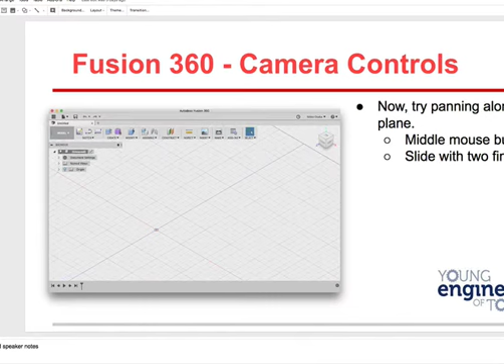I'm going to go through a real quick review of what we did last time and go kind of quick, so that way we can go on to doing the next part. So yeah, making a lamp. We talked about what CAD was, and we started using the work screen on it, and we made a box. And I'm going to go through the steps in this, and remember we had the edges on it, and then we could place materials. We put a hole in it.

All right. Now, what I want to do right now is do it on Fusion 360 and show you some things we did there. And you can go doing it right along with me. So, yeah, Fusion 360, please bring it up. All right. So now I'm going here. I got a new sketch right up here. It's untitled. I'm going to create a box.

Now, the minute I click here on the box, notice it's a sketch. One thing I want you to understand: sketches are 2D. Boxes and objects you make many times are 3D. So that's what's going on. When I go over there, it kind of just messes up. So I'm going to take a point here.

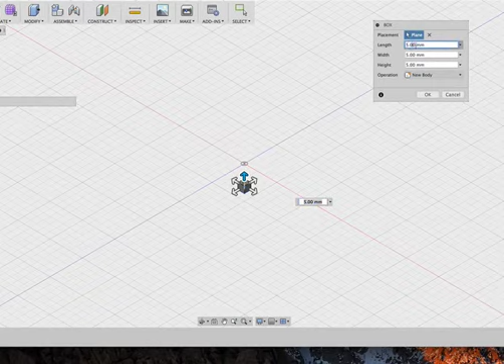Now, I had this box. It becomes now a body. And that's what this is right here. If I turn this off, it'll go away. I turn it back on. So real quick, draw your box, just so you see that again.

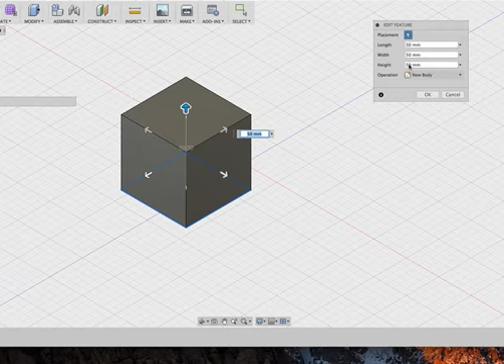And then as you draw your box, remember, don't click on these top ones. Don't just create a form or extrude. Go down, select the box, nail it. All right? Then highlight the box, right click on it, and you can edit features. That's where you go when you want to change the size of the box. Sometimes it doesn't show that, so remember to go back and grab the whole thing. But in here, I could change these all and make them all a different size. All right?

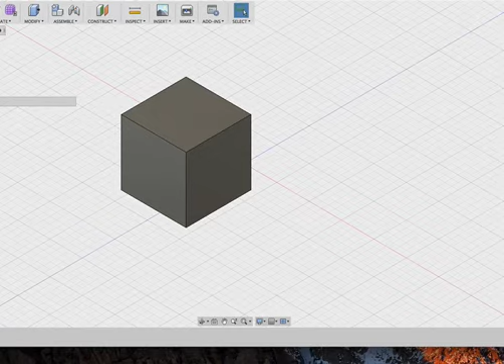Raise your hand if you got the box made, so that way I know you've done the box, and I can show you some more things off that box. All I want to do is spend 5 or 10 minutes on this review and get on to the next part. So let's get you going on this. Is anybody raising their hand right now? Raise your hand once you have it. I will wait until you've done it, because it still makes more sense for us to do that.

Got our hands raised? I'm going to assume at this point, if you can't turn your program on for some reason, just raise your hand then, so we're not waiting on you. But if you're working on it, we understand, and I will gladly wait. So Calder or Ethan or Mike, Raiden, if you've got it, raise your hands and leave your hands up.

Okay. Again, if I go here, select it like that, right click it. Remember, feature is changing the size. If you do properties, you're going to get physical materials, appearance, all that, which is really useful if you're an engineer, but we're not engineers yet, so we're just going to go with this now. But you should just know the difference. In a lot of programs, properties give the description.

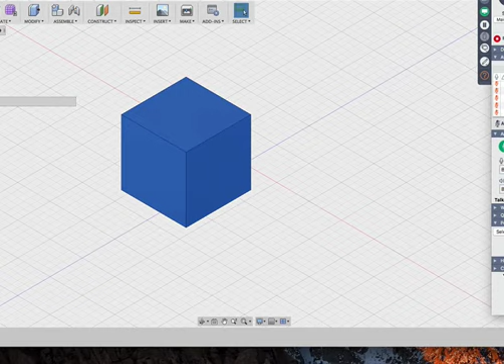All right, next thing then. We want to modify this. So we're going to click, we're going to hit fillet. Now, what I would really suggest, I'll put everybody's hands down now. Go back over here. The menu, follow the menu. Whenever you select fillet or edges, there'll always be a menu. So notice it says, hey, select the edges.

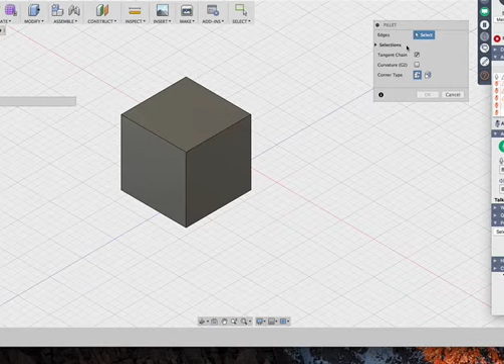Now, if we go over right now like this, we should get all 12. I did. Sometimes you don't, and I physically have to go around each one. And then I'm going to make this, let's make it, oh boy. Let's make it 5. And then we say, okay.

And there they are. That's my fillet. We did that. And finally, let me see if there's questions. Let me check questions. If I leave it because I'm in the car, I understand. Wow, how did you get?

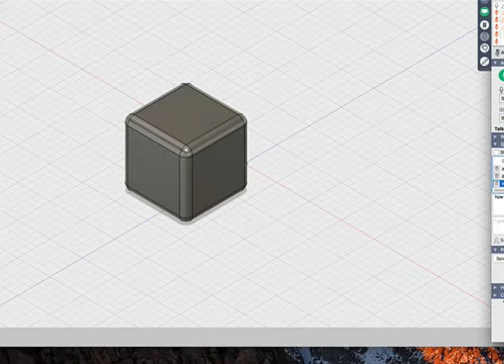All right. Now, next thing, I'm going to go another create. And what we're going to do here is a hole. So I just put this on this plate. Again, placement here. Then it says hole type. Simple. They have counter bore, counter sink, all kinds of nice things. I'll go counter sink just to try it.

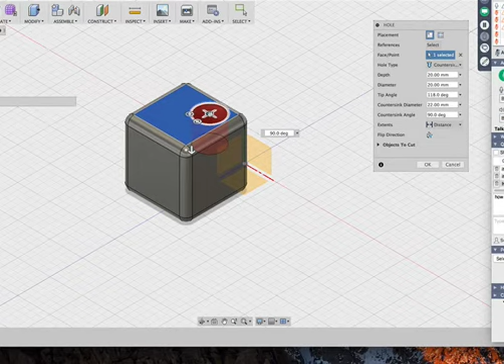All right. Notice you can change that. If you make it a counter bore, you can start counter sink. You can do all these extra things. So that's a little bit better with a counter sink. I'm not really worried about changing it. Say OK. And there it is. Remember, we use these to get around, pan, zoom to fit.

We have a square up here, which isn't always really easy to see. Move that around. And there it is from the top. And there it is. Okay? And then we went into materials and properties, but we'll do that in this next thing we're going to do today. But that was really the kind of goal. There's our bodies. And you kind of get a sense of what we're trying to do with this. All right?

Anthony, you don't have Fusion. You're going to need to go. Okay, guys, you weren't here, so here's what you need, and you get to the webinars. I'm going to take you right here so you can download it. But you really have to have this. So go over here and watch me. Everybody else, watch me if you don't have Fusion. You're going to go to Fusion. Don't get it yet. You're going to go to Fusion 360. You're going to go click there, and then select the one that says Free Software for Students and Educators.

Create an account. Use your school email if you can. If you can't, talk to your folks. Or if you already have an account, sign in, then register, and then it'll have the download. For today, I'm recording this, so I'll make sure it's getting recorded. It is. If you don't get everything, just follow along, then you can watch another recording. I also, if you weren't here yesterday, have handouts. There's the PDF right now of the handout. Making a Lamp Part 1 PDF.

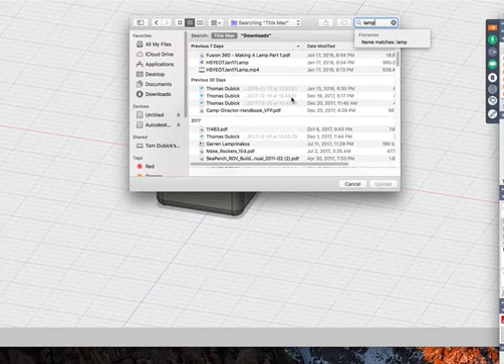Now let me see. I'm going to choose a file here. I might add another file, because you're going to need it. Let's go here. There we go. I'm pulling down a file here. Okay. It's not what I want. I thought it would download right there, and I don't see it right off the bat. Let me do a quick search. What was it? Lamp. Nope. Okay. Bear with me one second. I will now go into Google Classroom. I'll tell you what, since you had that request, we'll do it all right now. Sorry for the interruption.

There's our first project, making a Fusion. I'm going into my, here it is, shade profiles. I'm not sure if I can just drag it in here. I don't think it'll let me do that. All right, let me do this. Download. It says I had it, so I don't know why I couldn't find it before. No, PDF, yes, that's so you have notes, so you can go through it. So I'm going to choose a file right now. There it is. I need everybody to download this file. It's going to upload right now, shade profile. Everybody's going to need that.

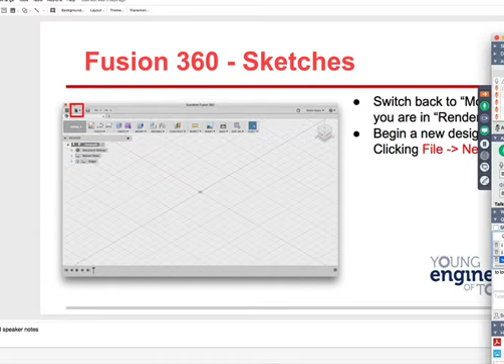You can't what, Ethan? Ethan, you say you can't download it? Are you on a PC or a Mac? Some kind of computer? Low battery? Well, get it plugged in, my friend. I hope you get it down the road. Okay, buddy? Just watch this and what we're doing. All right?

If I have to, we'll get this thing loaded as soon as possible later. All right. Now, we're going to go back here. You're going to go under File, New Design. I'm going to show you on PowerPoint first, and then we'll do it together. But let's look at the presentation, and I'll make sure to show both ways a couple times. So you're going to go under New Design. Up here, get New Design.

Then, over here where it says Insert, you insert Attached Canvas. Everybody watch me first, then we'll all do it together, okay? Watch me first. So you're going to insert canvas. In fact, I'll do it in Fusion. Maybe we'll do the PowerPoint. I know that might make more sense. All right, so here we go. I'm going to go over here. File, New Design. There it is. Just watch me. Don't do it yet. Insert, attached canvas. Just like we said before, look at the menu that pops up and follow the order.

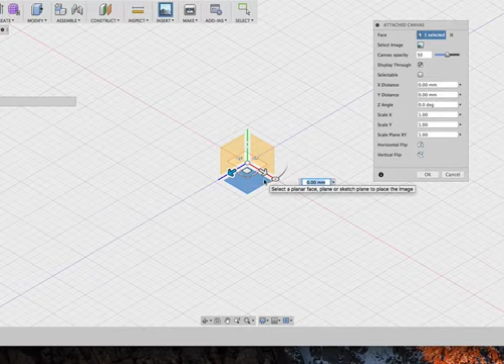First thing, identify the plane. I'm doing that right there. Then I'm selecting an image. Now I'm going to pick shade profile. There it is. I hit open. Now, opacity, I'm going to make sure that's at 50. Yours might be at 100. But I'm going to zoom in a little bit. And when I do, I realize the lampshade, I'm going to zoom this to fit.

All right. This lampshade is the wrong direction. I don't want it there. So I'm going to go to Z. I'm going to make that 90. Now it's about where I want it to be. Then, notice up here, there's nothing on here until I say okay. Then it shows canvas. And if I look at my canvas, it shows shade profile. So let's all do it now together. I'm going to back this up.

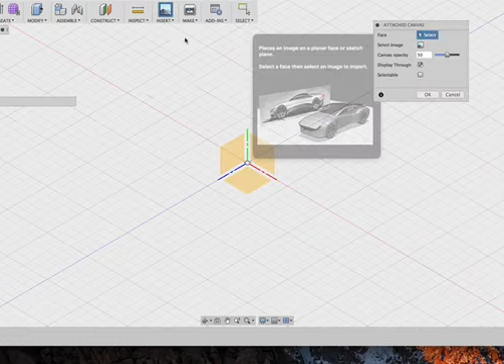All right, so I'm going to come in, everybody together, hit insert, hit attached canvas. Select the face. Boom, there it is. What I want you to see, of course now, I'm not sure why, but all of a sudden it doesn't want to do it. Let's try that again. Insert. There we go. All right, I was able to select it. It was something with my webinar software. That's why I was doing that.

I got one selected. I'm going to select an image. Shade profile. Notice when it's 2 dimensions, it's usually a sketch. And this is what we've got to begin with here. Opacity means how well the grid can come through my drawing. But I still want to see my drawing because I'm going to trace it. Then, it's going the wrong direction here. So I change the Z angle. I select 90. Now it's flipped to about the way I want it.

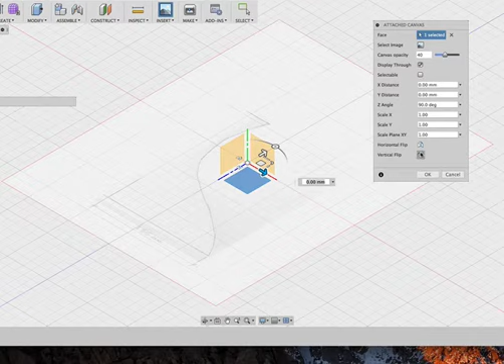You can do a horizontal flip. You can also do a vertical flip. There we go. Once you have that, I'm going to say OK. Now, in case you're saying to yourself, how do I change this? Let me close this and make sure. If you see canvas, over here by comments, click on this down arrow, then right click on shade profile, edit canvas. That will allow us to do things right up here. So when everybody has their canvas like this, let me know.

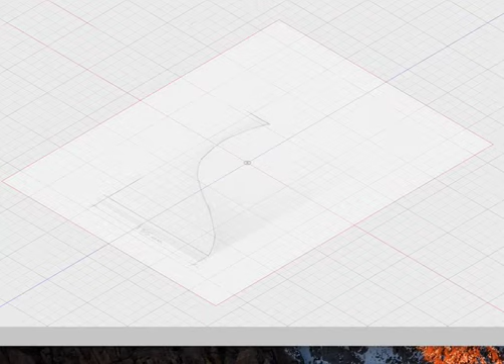So think of Fusion: when you're using Sketch, that's 2-dimensional. When you make the blocks, the cubes, everything else, that's 3-dimensional. Raise your hand once you've done it, folks. All right, a bunch of people have. Well done. Let me go down and see what questions we have. No questions. Raise your hand once you've got it. Mike, we need to make sure you guys got Fusion 360 loaded and set. All right. We got just about everyone here.

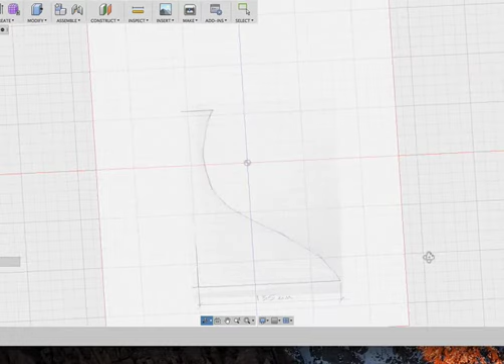All right, now I'm going to go back over here. I'm going to move this around. I'm going to grab that square and get it turned around like this. I can also do it here, but personally, I don't like using the orbit like this. I like grabbing the square, but that's just me. Again, hit escape to get out of the orbit or panning. If you hit the little hand, you can pan it. But if you don't want to be in that anymore, make sure you hit escape.

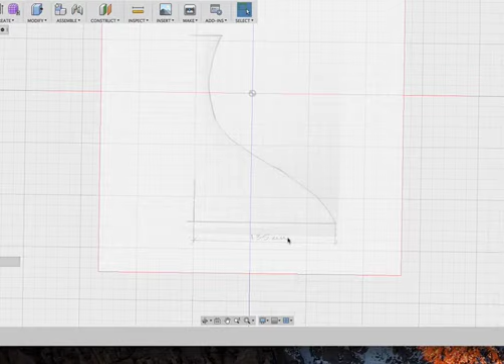All right. Our drawing calls for 135 millimeters. We don't really know what size our drawing is yet. So the best way is what's called calibrate. Because remember, when something's digital, you really don't have any sense of scale. So I'm going to go to Shade Profile.

I'm going to right click. I was renaming it, almost there. Hit Calibrate. I'm going to zoom in a little bit more, gently. I'm going to pick here. I'm going to move it over, pan over, hit Escape once, and then hit here.

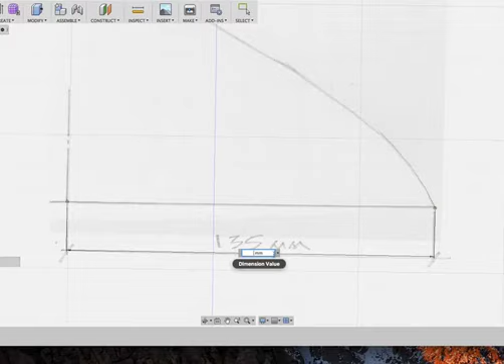Now, look at what I'm doing, guys. Don't you be doing it. Watch what I'm doing so you can understand. If you look at this, it says, oh man, I'm 6.3488 millimeters. Well, we want it to be 135 millimeters. So we need to go down here, change it to 135 millimeters, and then press return.

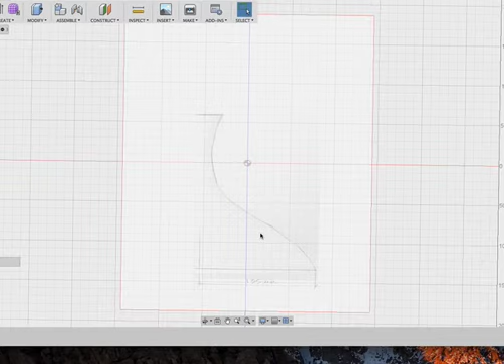And now all of a sudden, oh my gosh, I've lost it, I've ruined it. No, you haven't. Go to fit, and you'll see it's just gotten a lot bigger. So don't think that you lost it. It's just gotten a lot bigger. It went from 6 millimeters to 135. Put everybody's hands down. Let me know once you've done that.

Okay, get your hands up there once you've done it. This is really going to be worth it, guys, once we get through it. It's pretty cool. All right.

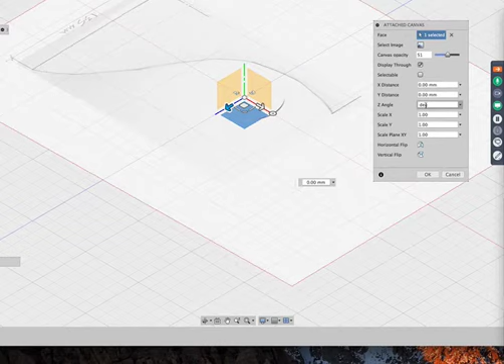Then change it. Now what you can do is flip it. All right, there we go. Wrong way there. Wrong way here. Let me see where we are. Yeah. I'm going to go back here and just make this 90 degrees. Okay. There it is, 90 degrees. There you go. So now you have it there.

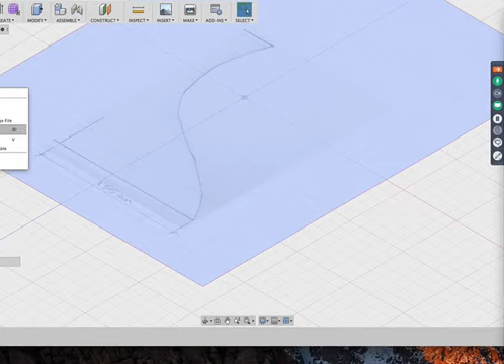We did something called calibrating it. And all you did is go to our canvas, right click on it. Well, wait a minute, lower it down to do all canvases. Right click on shade profile and then do a calibrate. That's where we went on one dot here, and we hit it for 135. There we go. Now, it looks like it's disappeared. It's just a lot bigger. If you do zoom to fit, you'll see it. There it is. Let's go back to 2, though.

All right, so there's my 2. I got this shape by changing that square up in the corner. Okay, there you go. Good. I've inserted my image. Okay, good job, man. Good job.

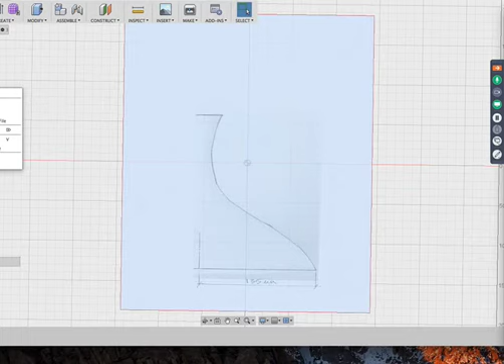All right, now, remember, I'm going to move the corner of this drawing right there because I just want it over there. If I click on shade profile, hit edit canvas, there I am. I'm okay. Now I'm going to say okay.

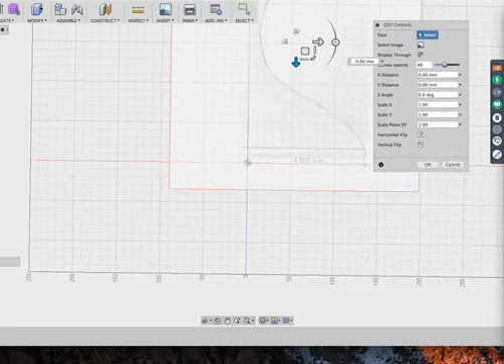So, actually, I don't like where I put it. I just messed it up. I want to go here. Edit canvas. I'm going to move it down here. I want the corner of my drawing to be here. If you can see on his drawing, he really didn't have it perfectly lined up. That's okay. And then we say okay. There it is.

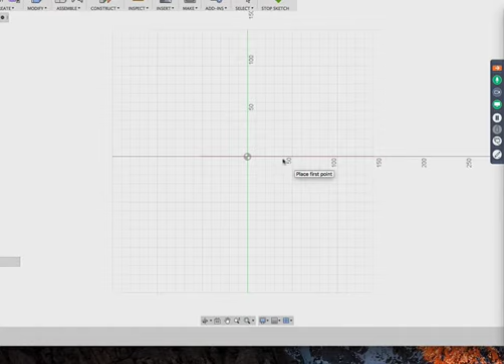All right. Now, next step. What I want you to look at now, let's get rid of this. We know we've got the canvas stuff. We're going to go back to sketch because we're going to trace over this. I'm going to do this by hitting L for line. All right, so here we go. Oh, I don't want to do that. Sorry. I'm going to undo line.

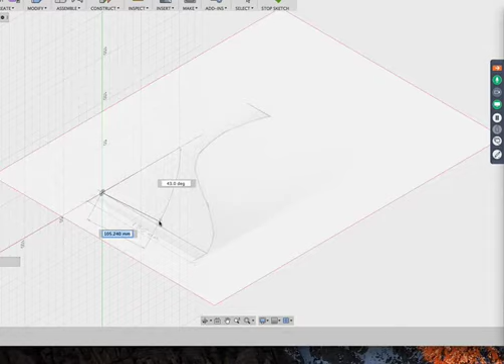All right, so what I'm going to do is, let me do it this way. Sketch. Go down here, go to line. And I'm going to click here. And I'm going to click right on the edge of this.

Now I'm just going to press enter. This line we've got to get rid of. All right, let me zoom this around a little bit better.

See, I've got another line. See how that's in there wrong? You know what, folks? I'm going to go back to home.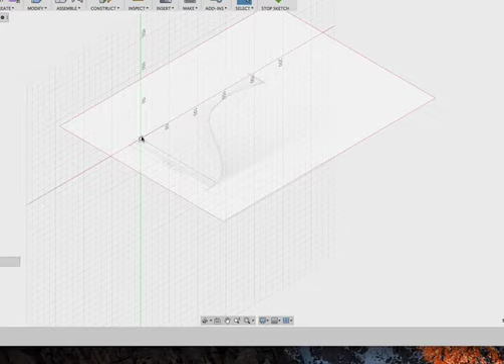That line, see how important it is to have your right line there? Let's get this turned, and let's move this origin. Let's not do it to the origin like that. I like the red line, and I like the corner there, but I don't like the fact that it wants to change top, bottom, and side by having it there. So I'm going to move this a little bit.

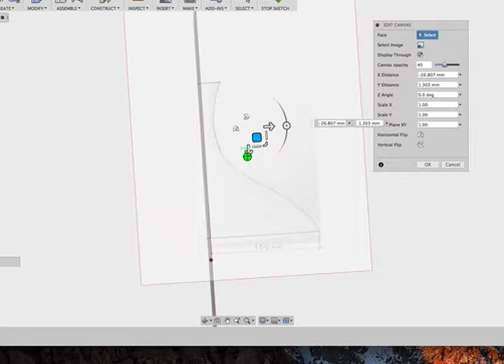All right, there we go. I'm going to still line it up here, but I'll move it right there. And then I'm going to go to front. So let's go up here. Top. There we go. There I'm on top.

This is more what I really want. See, okay? Then let's zoom in here. We're going to make our lines again. I don't have to worry about it blasting through like I just did.

So go to line. I'm not sure I'm getting this now. Unless I'm just drawing in the wrong line, which might be. Let me see something.

Okay, this is what happens when you get weird in 3D. All right, I'm going to do that.

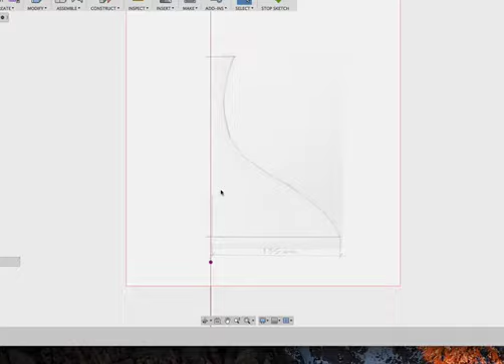I'm just going to start over here, folks. I've gotten my origin off. So now I'm not really drawing. This is not in the right plane anymore. I've messed this up. I'm going to go back.

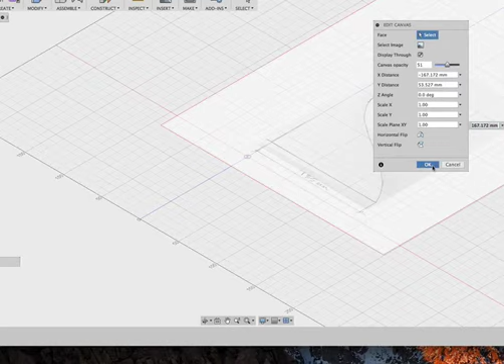I think the better thing for me to do is go here. Of course, edit canvas. I just want to keep it sure I'm on this top plane. I'm going to make sure I calibrated it.

Calibrate. Bear with me one second. Yep, it's calibrated. Escape, we're set there. I want to make sure I'm on this plane right here.

Oh, don't do that. Let me use my hand here. Pull it down. Sometimes honestly with Fusion, it's faster just to start over and do it again. This is not hard, what we're doing here.

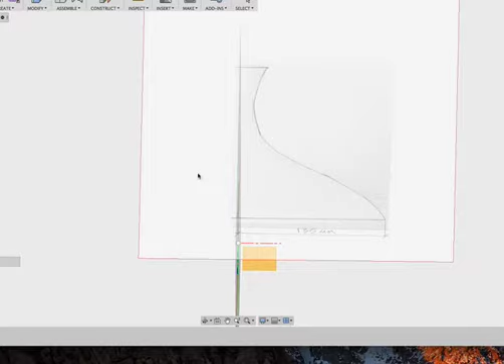So I'm going to hit create a sketch. Line, which is also L. I'm going to select here, this point right here. Let's go back.

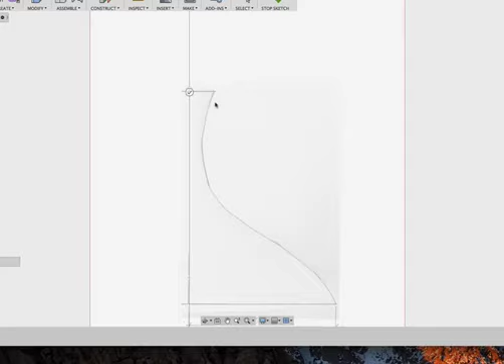Top, come on, let's try it right here. Got one line there. So I'll start down here, hit L again, click here, to here.

Let me get the zoom to fit. Then up here.

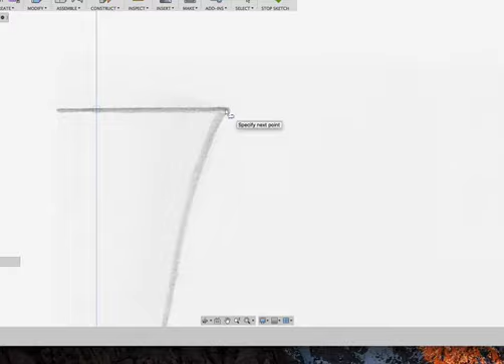Folks, I've taught this seven times today, and I'm getting a weird one. I use this square up here. I rotate it off. I'm in a wrong, somehow I've got this thing acting like I'm in a really wrong axis. So I'm going to go back.

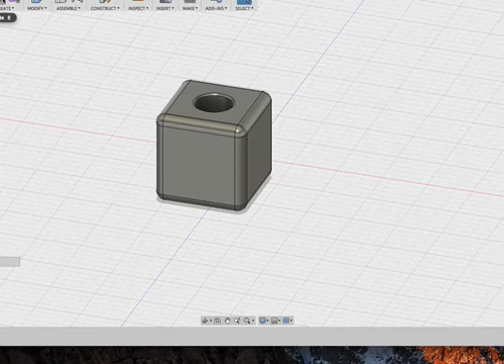No. I'm just going to get out of here real quick. Let me do this. All right, here we go.

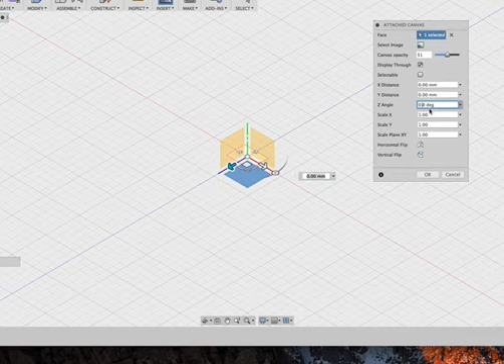Bear with me. Done some of that. There's 90. There it is, that's good. Okay, okay.

Right now I'm going in there. It's editing the canvas, don't really need to do that. I'm going to calibrate. Now I think about it, calibrate it, because I started over.

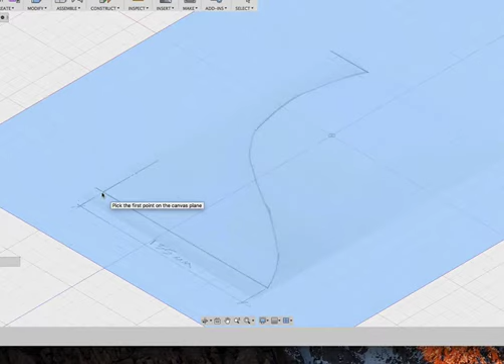There's 1, 2. Make that 135 as it calls for in the plans. Zoom it to fit.

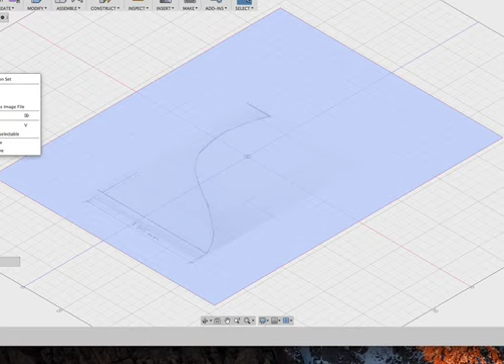Great, now I'm going to move this. Having done that the last time, I'm not doing it that anymore. I've not had that happen before, but you know what? That's going to happen again. I'm going to just move it like over here.

Okay, now I'm going to move this box till it's where I want it, right there. And what I want to see next. Make sure not to. All right, great. So we're still where we need to be.

All right, then go to sketch, go to line. Mine is that really weird. See, mine is now placed. See how it's placing it?

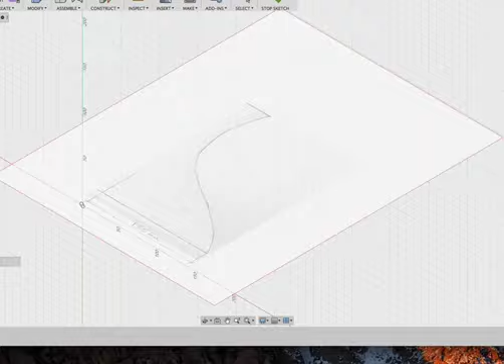No matter what I do, it's. All right, let me try this. It's not going to place on my. Folks, I got to get all the way out. Mine's just acting odd. I thought it was me at first.

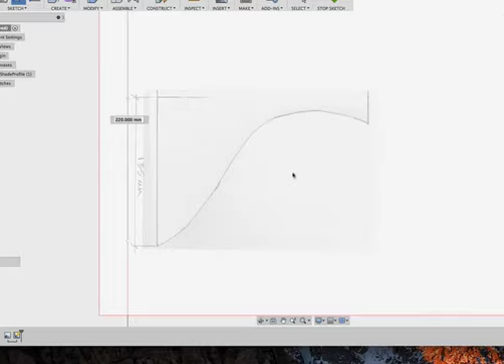It's my Fusion. Bear with me a second. Don't save it. I'm going to start it back up. Hopefully we'll fix it. I apologize if you're trying to rotate it.

I can show you on my presentation slide what's going to happen. Let me go back over to that. So, and I'll bring it up in a minute. We changed it, changed the opacity. We rotated it around so it would look like this. Let me go ahead and bring it up like this.

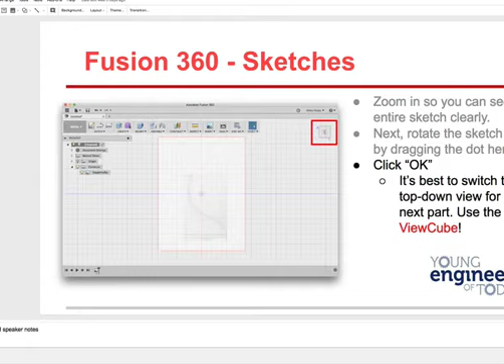All right, so we changed it so that was the top, so it was like this. And that's what I expected. Then we're going to calibrate it.

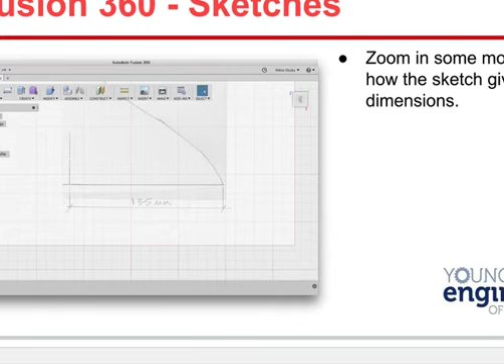Hit right-click on Shadow Profile. Hit Calibrate. Change that to 135.

You want to line it up with the axis, so we hit Edit Canvas, and we move it over the axis. He's got it right on there.

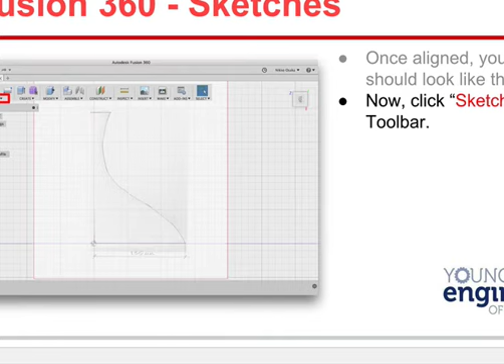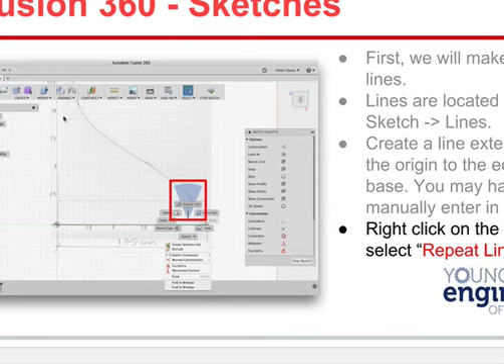So anyways, you go to Create Sketch. Make your line - you're going to create a line with an endpoint. What you're going to do is just go from here to here and keep drawing it all out. You're going to do this line right here, and the line at the top.

That's what we're shooting for. Line bottom, line up here, then line up at the top. That finishes it. Then you use something called splines to work your way all the way down this.

You don't need a ton of them - that's a lot right there. But once you've connected it all, it'll go to brown. That's what we're trying to get you to go through.

So let me try just one more. I'm going to pop it open and see what the heck's going on in my Fusion. I'm getting this weird thing - it doesn't want me in the right. I'm not sure why it's doing that. So I'm going to go and try it right now.

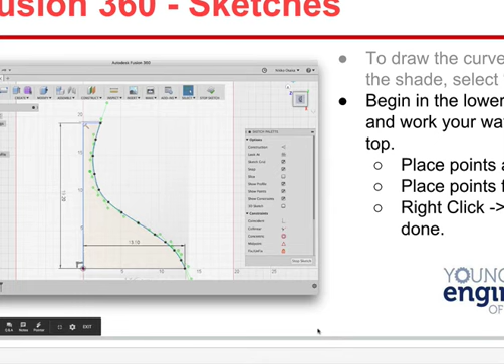How many people have gotten it to the point that they're ready to start putting this together? Okay, put your hands down. Let's see if you're ready to do the splines.

Okay, I'm going to go ahead and add this while you're doing it. Okay, let's do it here. Let's go - again, insert. I'm going to bring this to home so it's where it normally is.

Okay, so I'm at home. I'm going to attach canvas. Right here's where we attach it.

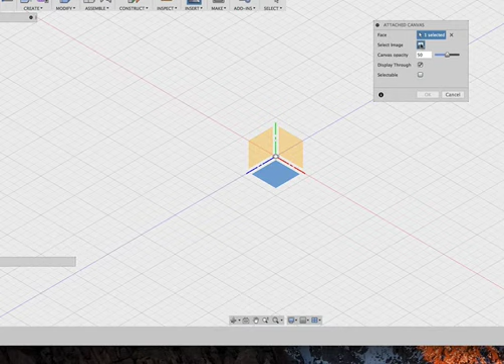Select an image. Open. Change this to 90 degrees - I've done this enough times. Okay, zoom to fit.

Click on this. Calibrate. Calibrate - make it 135. Center - it's going to be too big. Zoom to fit. All right.

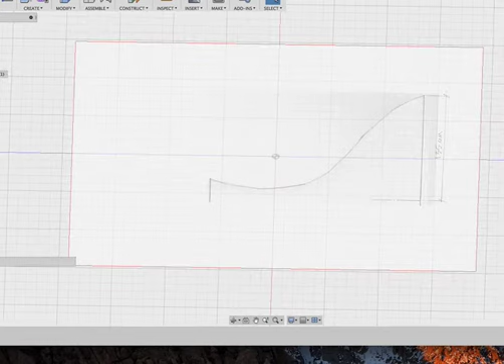Now I just want to draw. All right, there we go. Now I just want to sit there, go to sketch, draw a line.

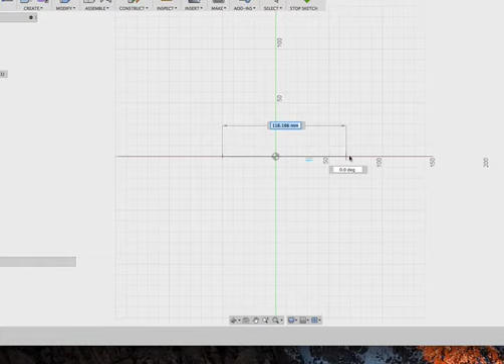See, this is what's wacky on mine. Somebody sees what I'm doing that's just fundamentally wrong here, let me know. Let's try this - stop sketch. I think I see what's going on. Stop sketch.

All right, let's go to sketch. Create a sketch. I'm going to click here. Let's make sure it knows that's where I want to be.

Let's draw a line. There we go - I just got to make sure I tell it up there. Press return. These are our controls on it. We'll get to those down the road.

Another line. Here. And then press enter. Turn. Got one, and then we'll press one more.

I'm going to hit L, I guess. Right there, take it out to here. All right, now I've got 3 lines. I can't really do the curve any other way.

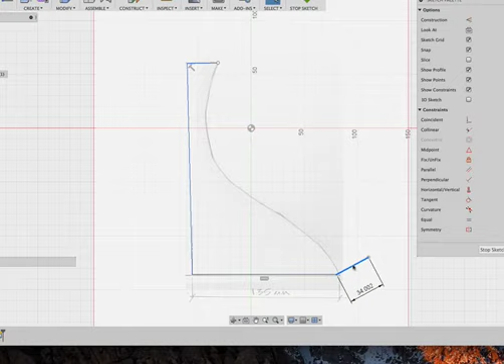So what I'm going to do next is delete that one. I don't need that - I want it connected there. So I'm going to be here. Now the next thing I'm going to do

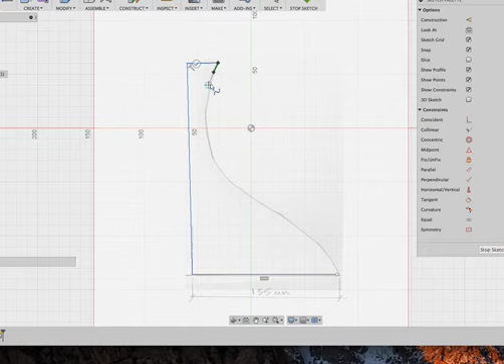is I'm going to do splines. So I go to sketch, select spline. Start up there - I'm going to start putting little splines down this. These are like nodes in Inkscape.

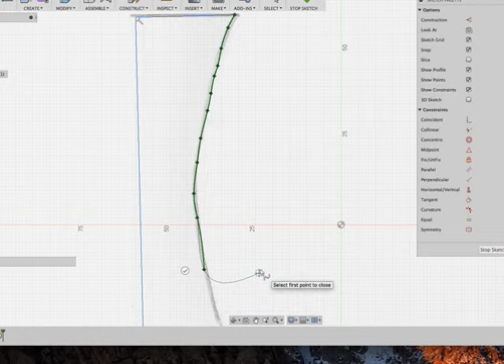Again. For speed's sake, I'm going to go fast. You can edit these and move these little lines around. Let's see if F6 will work. Great.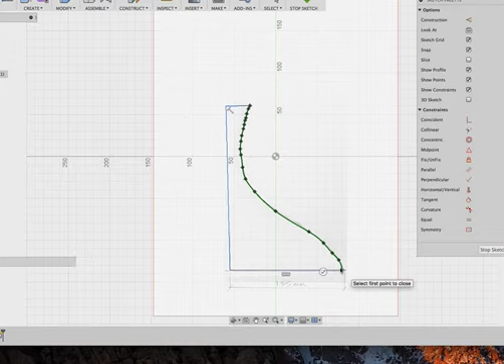So press return once you've done that, and see, I got that brown. That's exactly what I want.

So when you do your sketch, make sure you—I'll show you real quick. When you do a new sketch, even after you've done that drawing, make sure you select that plane there. That way you'll draw on this line. Didn't have that problem earlier, but it did it just then.

Okay, where are we with people? All right, raise your hand if you've got some kind of brown going on there right now. Remember, once you get down to the last green one of the spline, press enter. So Hannah's got it. We've got a bunch of other people working on it then, apparently.

Now I'll go through it again with you exactly what I did. But I want to show you, because this is going to look really cool in a moment. Once it's done like that, I'll show you so I can help you all get to this point.

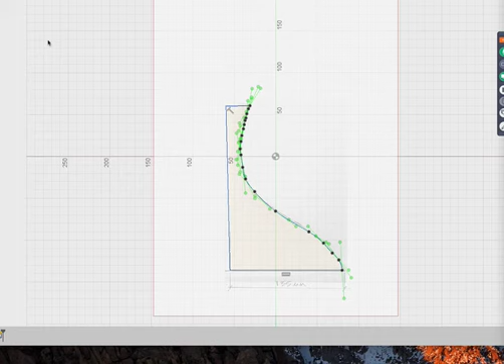If I go up here again, and go to Create, then Revolve, select my profile—it's the thing we just drew. Select my axis—it's the edge of the side of what we just drew. And suddenly now I have what looks like an upside down cup. Say OK.

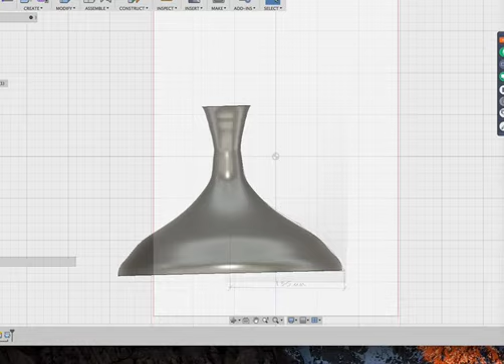And then really, we can change colors and everything, but there it is, see?

And what I'm going to do at this point is go to Modify, go to Shell, select Shell right here, go to the other side—I'm going to use the square cube to get me there—that side. Now I'm going to make the thickness point five.

0.5, let's see if that'll work. Sometimes it makes it 5 millimeters. Don't make it 0.5, make it 5 millimeters. Select OK.

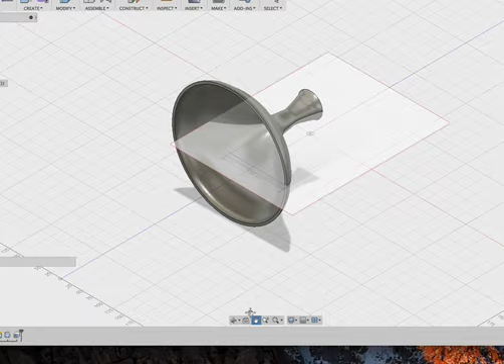And guess what now? What's really cool is this thing has got a hole in it. And I don't know, I think that's just cool. So, whoops—look at that, it's got a hole all the way through it.

All right. What that means is you can take something, draw it at home, bring it in, we can scan it. You can get it right into your software, save it as a file, and you can put it right on this. Isn't that amazing?

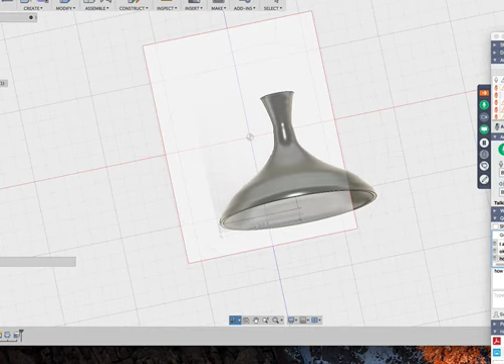All right, I'm going to go back so you can see where we are with this. I'm going to undo the shell. There's my drawing. Let me get this back to where it was. Let me get to front—whoops, that'd be top, actually.

All right, now raise your hand if you got at least to here. All right, where can I help people?

Now let's go through and let's see if you can make it. Once you have it like there, it's got to be brown. If it's not brown, it means you have it connected here, or over here and here. How did you rotate it with that square?

So what you do is—how many people have got it looking brown? So I don't know, Mr. McGinn, Mr. Matura, Jordan, Graham, Mr. Wang. All right, we got 8 people. We've lost 1 or 2, but okay.

Have you gotten into this brown part that you can use in the software? You got a question, great. Bunch of you do now. Excellent. Okay, once you have it like that, let me click over here.

We're going to create again, we're going to hit Revolve. Go to Revolve, first thing select the profile—it's this thing right here. Then select the axis—I'm going to select this axis right here. See how it formed right there? And then you're going to say OK.

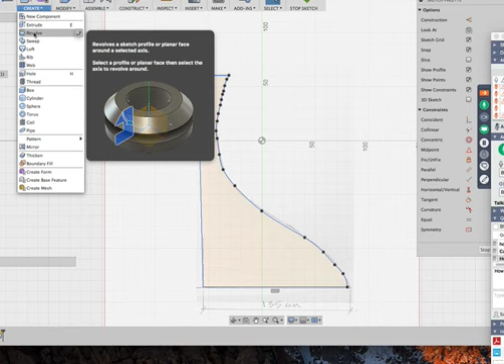Menu choice is going to come up, it may be slid behind something. But go on, select the profile—that's this. Then select the axis, so click on Select the Axis and go right here. Do it on the axis of your drawing, it makes more sense. And then say OK. There you are.

Did that help, Liam? Mr. Snodgrass?

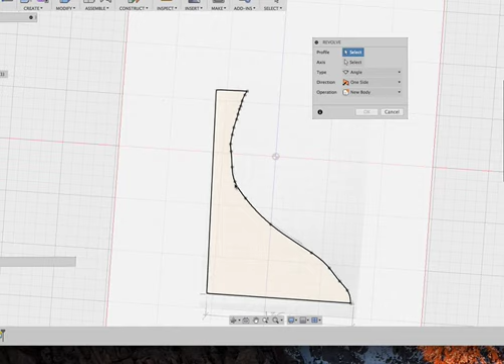Where do I go when I'm at Revolve? I just showed you, Aiden, but I'm happy to show you one more time. Let's do it. So, you're at this. You go to Create, click on Revolve. Find out where this menu is. It should come up. Then select your profile. It's going to be this. See the blue right there? Then select Axis. Pick the axis of your drawing. This will form just like this. And you say, OK.

If you made this look something like what I have, raise your hand. I only have a couple people saying they've raised their hand, so I'm not sure why, or if I've confused it. I'm sorry. It does look cool, you gotta admit that. But Anthony, Calder, Hannah, Liam, Logan, Mike, if you can't access the software, just raise your hand. But if you can access the software and you're struggling, write down what your question is. I'll even unmute you and I can ask you.

Leave your hands up, guys. When you take them down, I can't tell. I had several hands go up. Now we got none. All right. Sorry for a little bit of confusion tonight with this. But make sure under handouts you download the slides for doing what we did here. This will be loaded by first thing in the morning. You can re-watch this part of it. But try to get this done. Try to get here next time by 7 o'clock.

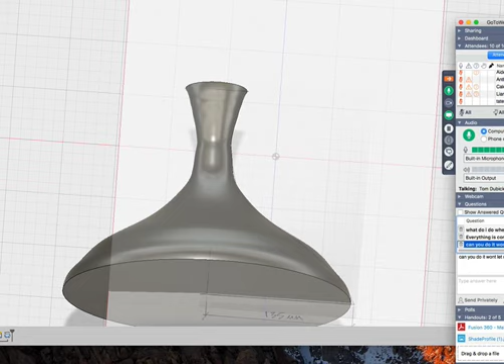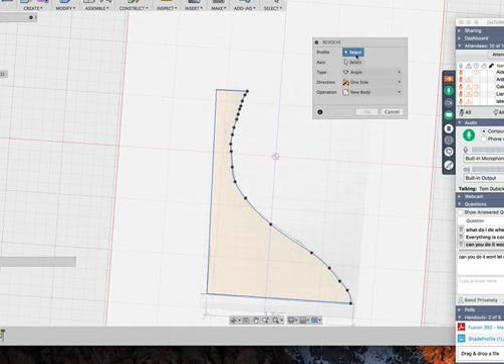Did it do this? Make sure after you draw these splines that you press enter. That's another thing people weren't doing. Press enter so it connects this whole face. It's got to be this brown. Then, and only then, go to Create, Revolve. Make sure you click on this blue line that says Profile. Make sure it says Select, and then click on it there. But it has to be brown. It has to fill in that whole area.

No, it didn't turn brown? Then you don't have something quite connected there. Worst comes to worst, redraw it and do it again. But chances are, you didn't draw this top line up here. One of these lines you didn't draw. You only use regular lines here. L, L, L. You use splines down here. Okay? And that's how you get this brown look to it.

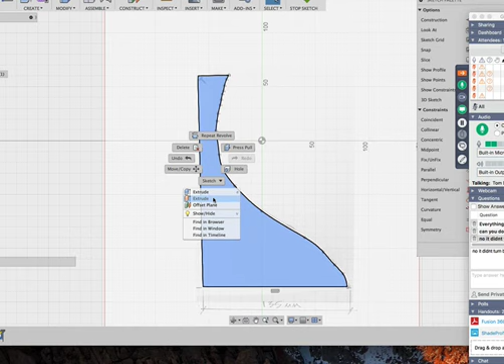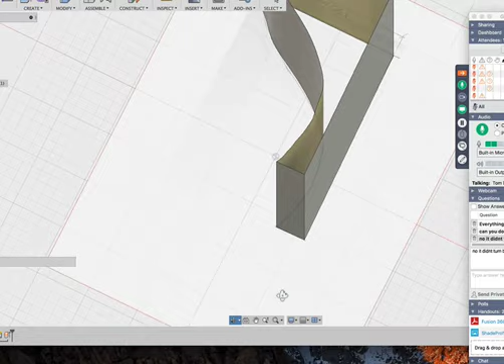You can extrude this, by the way, because now this whole blue thing, so if I wanted to, I could do this. You could pull it up, grab that, I almost had it there. Pull it by there, and you could extrude it out like this. See how I extruded it? But the only way I can extrude it, it's got to be considered a solid thing. Now, I cut out the edge of it, which is kind of cool. Anyways. All right, let's just undo what we just did. Once it's like this, then we can start doing things to it.

How to make a hole into it? Logan, great question. Look at the handout I gave you, but really what you do is if you go under Modify, you can go ahead and select Shell. All right.

Okay. My next class is starting up in a minute. I will have the recordings. You do have the handout. Work your way back to the handout. We'll get you squared away there, okay? Fusion 360 also has videos on this very thing. So let me give you my handout. Let's get back on that.